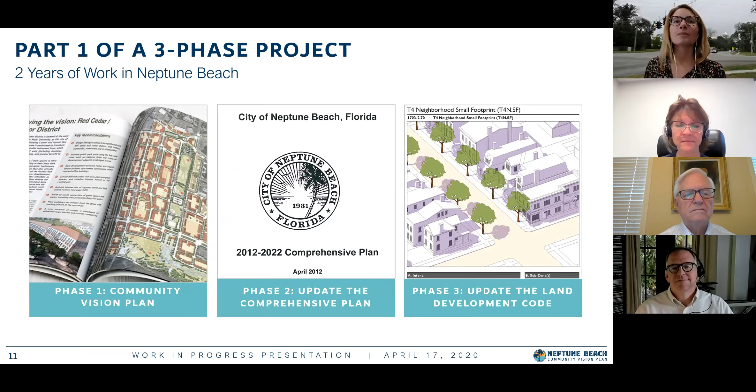I just want to remind people that this is part 1 of a 3-phase process, about 2 years of work in Neptune Beach. So we're working right now on the community vision plan, and that will serve as the foundation when we go to phase 2 and 3 to update the city's comprehensive plan and update the land development code.

This virtual charrette, this week of intensive workshops with people, stakeholders, and technical meetings, all of that had to happen in a virtual format. So here you can see some of the highlights we had throughout the week of our team working on tablets to draw sketches, working with Zoom to have technical meetings, and doing live streaming.

We had a number of tools available, and you can see some examples of that: people talking to us with the planner, live streaming all of our open design studio and all of our public meetings, and also using social media to advertise all of the events.

At our kickoff on Monday night, the video for which you can see on our website, we did a presentation like this one and then broke out into individual Zoom rooms. Here you can see Joe Coles was our facilitator in that room, with everyone chatting and having a good time. It was a nice way to connect with people.

This is our participant count so far. We're still going back and tallying these, especially with the live streaming - we haven't checked yet who's been watching the videos. They haven't been up for very long, but we'll be monitoring how many people are watching these meetings after the fact as well. We've gotten a lot of good participation, and a lot of people stopped by our open design studios for one-on-one conversations. It was great to see.

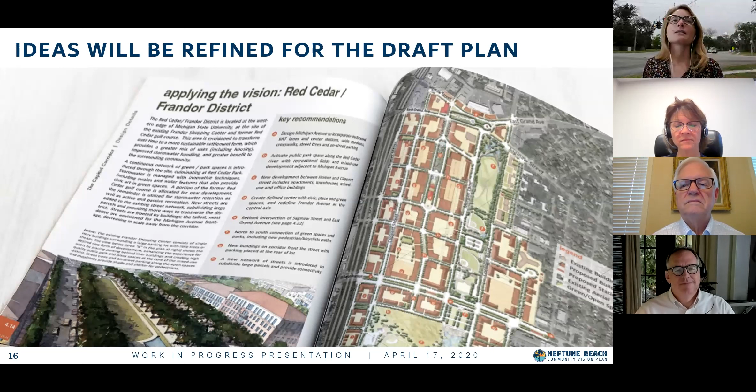All of this input is going to be refined over the next couple of months and will make its way into the draft plan. But nothing is final at this point, as Vice Mayor Jones said.

So let's do a quick poll to see who's in the room, as we always like to do. I'm going to launch a poll - you'll see just a couple of questions. Those who joined with the Zoom app will be able to answer them, and we'll take a look at the answers together, and I'll read those out as well. Should see a pop-up window which you can move around. Question number 1: have you attended any of the previous public meetings, including the January project kickoff, February neighborhood workshops, or any of the virtual charrette events? Your options are yes or no.

Second question, what neighborhood do you live in: Neptune Beach east of 3rd Street, between Penman Road and 3rd, west of Penman Road, one of the other beaches communities, the city of Jacksonville, or I don't live in the greater Jacksonville area. And finally, how old are you?

All right, we're getting several votes. About 50% of the people who have the ability to participate in the poll have answered. All right, about 60% have voted. Okay, seems to be a lull. A couple more. All right, going to go ahead and close the poll.

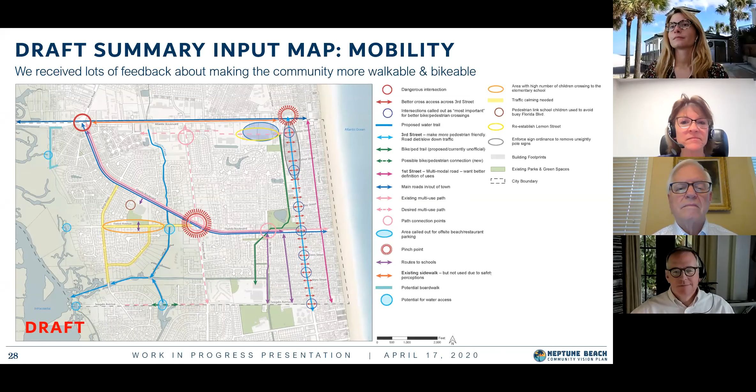I just want to say a couple of things about the shuttles and how they work. Most of these are what's called demand responsive, almost like Uber and Lyft, where you can actually summon a vehicle on your phone. These different shuttles don't follow any particular route like public transit, but rather they will come to you, or at least close to you, to pick you up and take you to a destination.

So that's why you don't see shuttle routes on the maps per se, but we do expect that they can link the various destinations. These shuttles are low speed, so they will typically go 10 to 15 miles per hour now, but we expect that they'll go faster over time.

We had a lot of people ask us, well, what does it take to get an automated shuttle? Around the state, we are one of the tops in getting pilots. So how can we help Neptune Beach pick some routes that are pilot projects where you'll be able to test it and see which sorts of trips are the best? You may need certain street design and some digital infrastructure and signage, so we'll make sure to include that in the final product. Next.

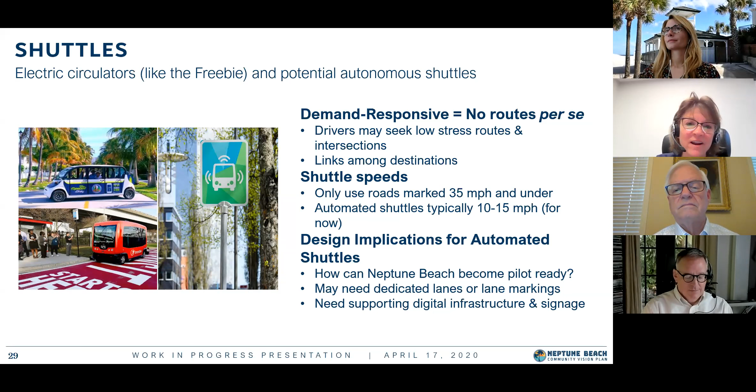We also are paying attention to parking. We understand there is a parking study underway, and a lot of the street work we're looking at has additional future parking implications. But the ones we wanted to point out are possible locations for garages. We got a lot of input on the necessity for beach parking. We've also got plans for some of the on-street parking in and around the town center, and we've got ideas there. There's also the possibility of a residential parking permit zone. Again, this is just draft, but we're looking at other cities to see how best to formulate something for Neptune Beach.

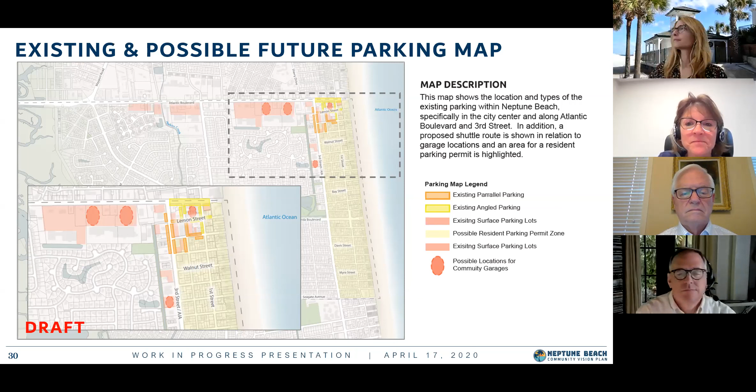We were also wondering about the parking garage of the future, because the state of the practice is in flux. Right now we have low demand, but as soon as we reopen we expect high demand. That may taper off over time as we find other modes and ways to get around. So architects are looking at adaptable garages. There's this thing called self-parking cars - you may have seen the Hyundai ad during the Super Bowl of the car that parks itself. That vastly reduces the amount of space needed for cars, and it's rapidly being introduced into new models. We're going to pay attention to that so we can give you the best input on how to design your garages. We also need to think hard about the reality of the finances, because construction, especially if it's quality and adaptable, can be quite expensive. So we'll be looking into that for you.

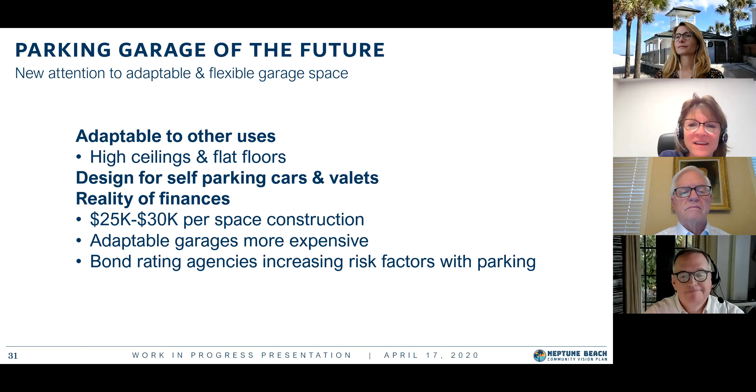For the residential parking permit, St. Augustine to the south actually has a pretty good one that they've tweaked a couple of times. Some features there: they allow Park Now cards for residents, so if residents want to pay at the meters at the town center, that would be made easier. In the controlled areas, residents can apply for two residential permits or decals that go on the car, in addition to guest and service passes. Then they assess the hours or restrictions that vary block by block, depending on the parking pressures. Multifamily may be included on a case-by-case basis.

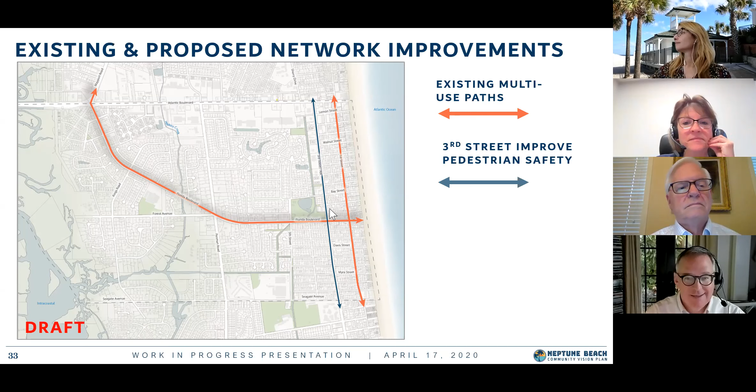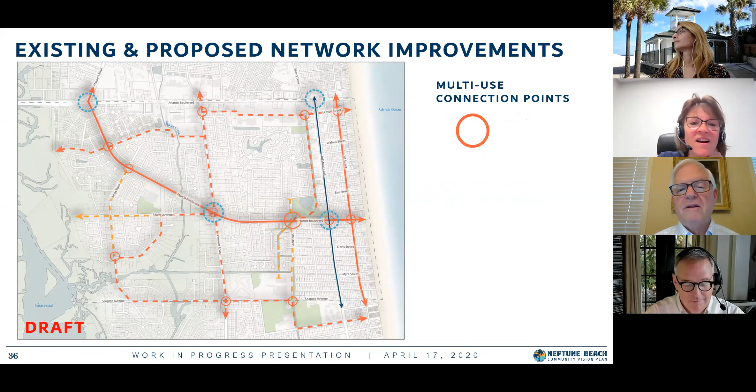Then we laid over that the top dangerous intersections where people really wanted us to focus. On top of that, we looked at some of the multi-use connection points - you can see some of these intersections show up in multiple categories. Then we put some of the key pedestrian points where we really need to focus, some along these roads but also around schools. That's where we heard the desire for better attention to crossing infrastructure.

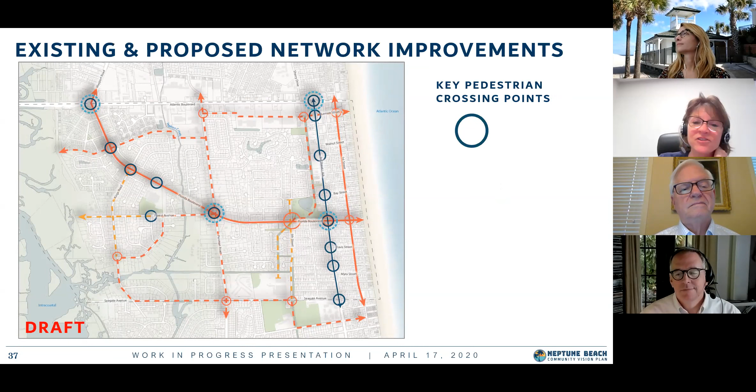And then this is just everything on the map. So if you want to go back and reference this map with your neighbors who couldn't make it, this is the one that puts it all together.

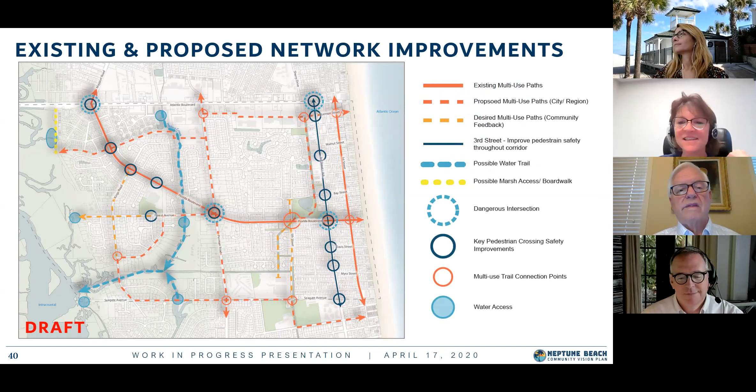And then with Rick, we've been looking at some of the FDOT, Florida Department of Transportation, context classification systems. Rick, do you want me to carry on, or is this your part of the presentation?

Rick, could you quickly talk through the context classification maps? Yeah, take us back one map.

The two major roadways are the ones under Florida DOT jurisdiction. That's A1A, locally called 3rd Street, and then Atlantic Boulevard. For many years we worked in the transportation business, and everything we designed was either rural or suburban - we didn't really pay attention to walkability in urban places. But this is a new DOT, a brand new approach they're taking now.

They have divided the state into context classification zones, zones of different context. The DOT has called the orange line at the top on Atlantic suburban commercial, as it exists today. The darker color is urban general. So you have enough of a grid street system on A1A and 3rd Street to bump it up from just a suburban category to an urban category. The higher your number gets, the greater your walkability - that's why it's important.

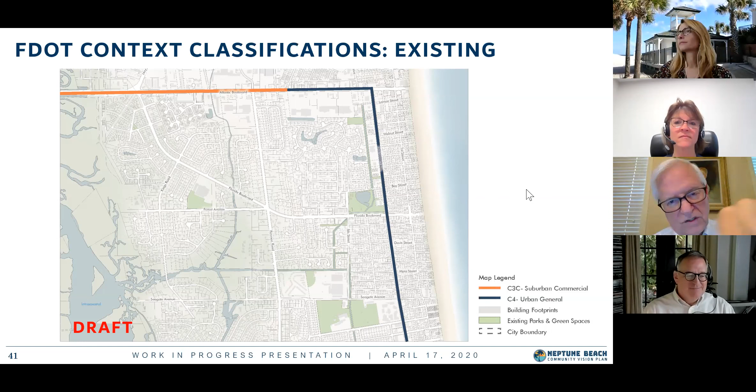So, Rick, I stalled there so you can show them the difference between existing and what-if. These are just showing the Florida DOT streets. What we are going to do is have the context classification definitions on all of your local streets also.

So the suburban is showing up here as a blue suburban residential, and the purple up in the upper right corner is an urban center, a C5. And this is a proposed version.

This gets us away from just being locked in on the existing way things are today. This is what we've heard from you as to what you would like to transform different portions of your city into - a different context - and take some of that urban center and move it out onto A1A and Atlantic. And then that's the justification for you to have DOT change the character of that roadway. Major, major change in the way they're doing business.

I'll add a point to that, Rick: this is about how land use and transportation overlap. So the goal is that you have land use patterns that match the type of street you want, and vice versa. The DOT can then, if you tell them you want this to be a slow or walkable street, come in and say, okay, what are you as the local government doing with your zoning and land development regulations to make the right kind of buildings and scale of enclosure on the street come to fruition from your local side, where you make the decisions. Then they're saying they will give you the street that matches the context you want. It's playing out pretty well across the state.

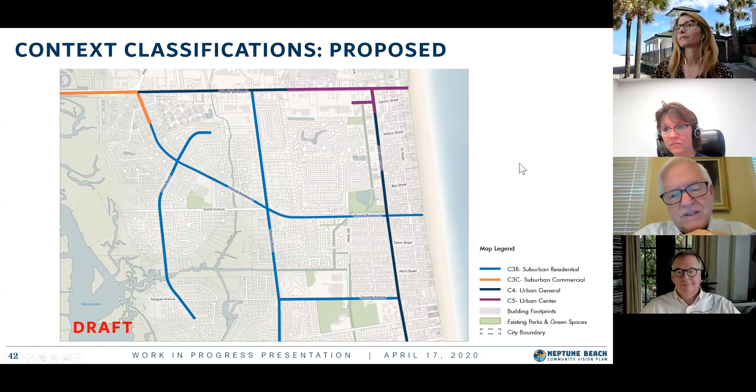Great, so I'm going to ask Brenda to unmute herself if she's not already. Brenda and Rick have been working this week on producing initial street sections that show how 3rd Street, A1A, and Penman can be redesigned in the future. Hi, yeah, can you hear me?

Okay, so this is what it looks like to stand on 3rd Street, A1A. You see here that you have a very narrow sidewalk and a grass strip, and very wide lanes.

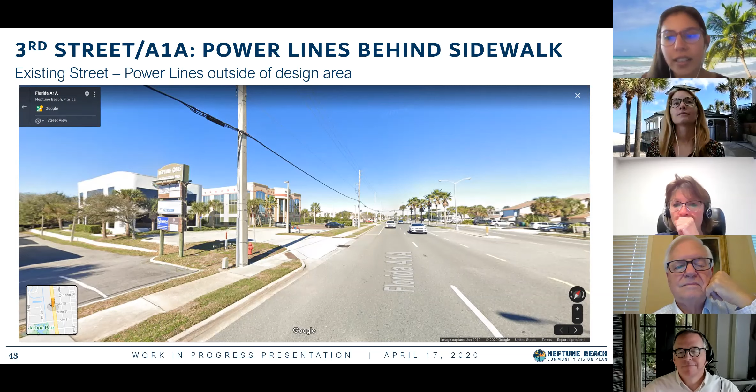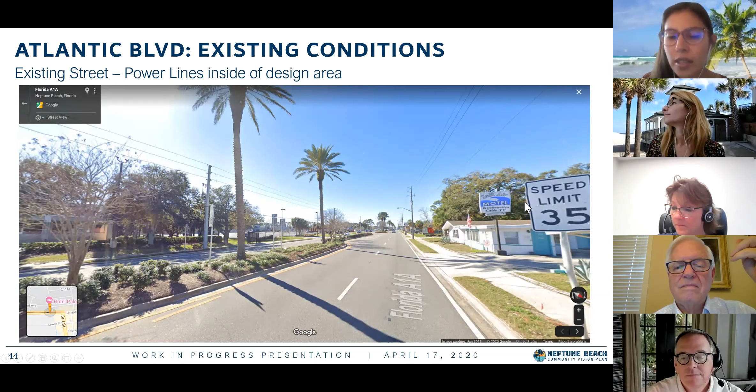And this is existing on Atlantic Boulevard. There is a median and there's left-hand turn lanes there. Also some conditions for pedestrians: you have very, very narrow sidewalks and a short grass strip. So it's not as comfortable as if you had shady trees when it's a really hot summer.

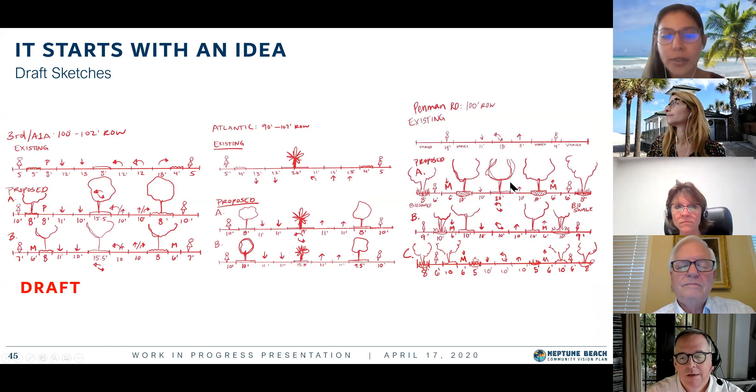So we started with some sketches. It all starts with an idea. We start sketching, it's all very, very rough. So this is what we showed at our pinups, and we all talk about it and decide whether these are good ideas or not. As you can see, there are many alternatives - there's an A option and then a B option, and sometimes a C option. So we work through that as a group and decide what best fits the streets.

So this is just modeling the existing conditions for 3rd Street. Again, you have a very narrow sidewalk and you have on-street parking. This is looking southbound. You have a median and very wide lanes, which makes traffic go really fast, even though there's a speed limit of 35 miles per hour.

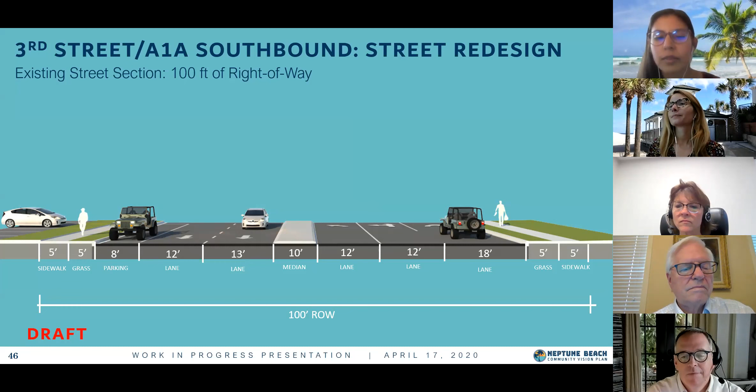Very similar conditions for Atlantic Boulevard. This is looking westbound. You have a nice median there, but most of the street is dedicated to vehicular traffic.

So this is option A, option 1, for both Atlantic Boulevard and 3rd Street. We noticed that they have very similar conditions as far as right-of-way - it has the same dimensions. So we said, what if we planned and designed something that could make it more pleasant to walk and ride your bike from one place to another. So this is a situation where you have on-street parking on one side of the street, and you have enough width for a bus lane for any bus routes. You have a narrower lane there. You still have a landscape median with shade trees, and you have the same condition on the other side without on-street parking. The goal of this section is to have a wider sidewalk on both sides and enough space for shade trees, which we believe would improve the walkability and experience of walking on these streets.

Right now, it's not very safe and it's not very pleasant. So landscaping that nicely would really improve that and give it some character as well.

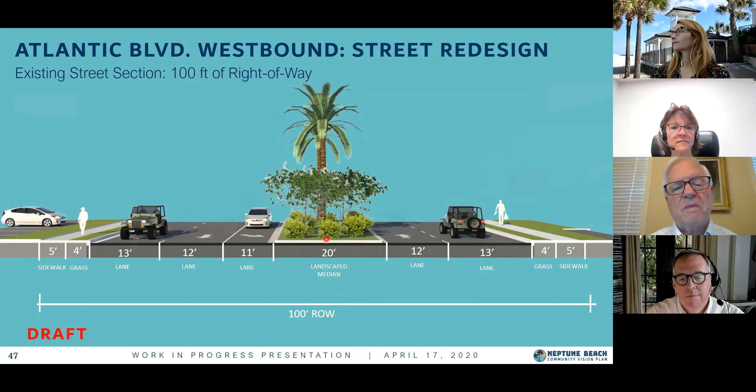And so let's go to the next slide, and you'll see the change. Look at the shade, look at the feeling of enclosure that you get.

These conditions, when they're put in, the people just appear. If there's any economic vitality in the city, which you certainly have, the people will get out and use these areas. The buses on the outside edge - that's the least amount of width they like to use in city transit, 11 feet - and what we do is take every half foot that we can, and make sure the pedestrians will be happier with the way we use the width of the roadway. A 10-foot lane may sound small, but a 12-foot lane is one they use on the interstate highway system, which is way too much for regular driving by people in a walkable place like this. And the parking we keep on one side would help support some of the commercial activity.

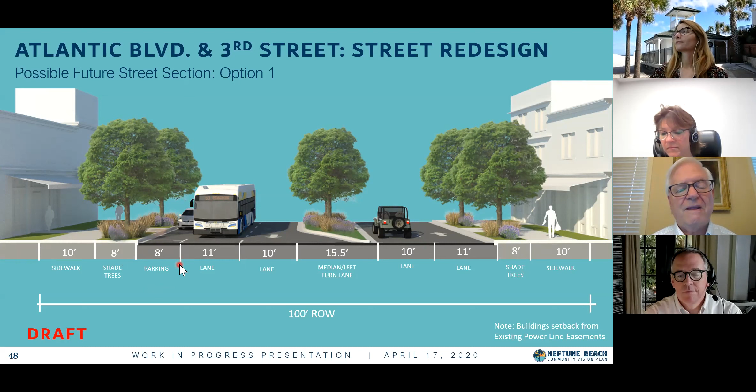Now there's a possible lane we've drawn in on the outer edge. You see the sidewalk that's 7 feet wide, and then there's a 6-foot mobility lane. We don't call it a bike lane, we don't call it a jogging lane. We say mobility because...

In the next 5 years, even we professionals don't understand what new modes might be used. There could be an electric scooter revolution, or something invented that we're not familiar with yet. So that mobility lane is going to be specified for vehicles under 10 miles per hour, under 15 miles per hour, or some limit on the speed.

When you have the same group of speeds that people are traveling, that's what makes it safe. Many of you have probably thought, I really don't want a bicycle out there on those fast-moving state highway lanes, and you're very wise to think that for your own safety. You don't really want to bicycle on the sidewalks all the way. So this mobility lane gives you a chance to get out there on your bicycle, your electric bicycle, or even walking, and have a good shady place that goes a long distance and really gets you somewhere as part of the system.

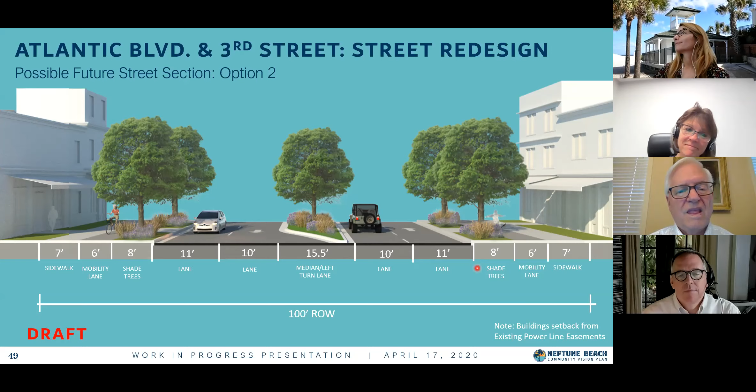Now over to PENMAN. PENMAN is one of the few long connecting streets you have besides those two state roadways. The cul-de-sac and suburban community patterns of development that happened after 1950 or '55 really were trying to keep out fast-moving traffic, so they're hard to get through if you want to go a long distance. And that's proper, we understand that. But this is one of the streets left to use as a mobility corridor for people who want to go a longer distance.

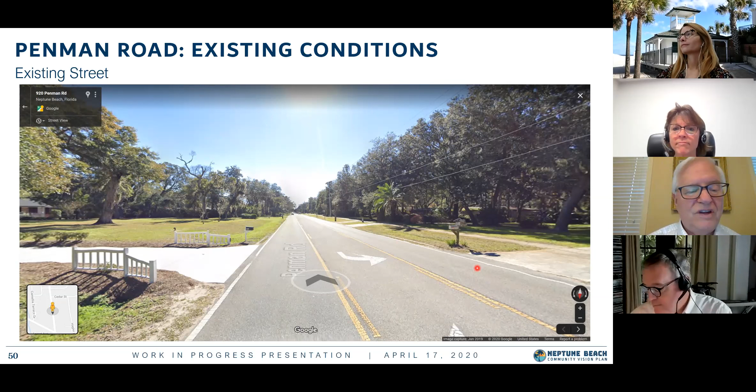But it's about 100 feet wide, and when you see this, you know it's really too wide to have drivers even think about going a little slower. So subconsciously, that foot goes on the accelerator when there's a lot of green grass on either side. And so that's the existing condition of 100 feet.

Two 11-foot lanes—not 12, and that's good that they're 11. We think they can go down a little more because speed is so important to the safety of crossing pedestrians and even the drivers themselves. Speed is so important that I have a radar gun. You push that little red button and get the speed reading of a car 800 or 900 feet away from you in either direction, coming or going. I take this wherever I go, studying places. I've used it in Neptune Beach, and you're mostly behaving yourselves. But speed is so vital that we pay attention to it with every design element.

Now that 13-foot lane in the middle—there are many driveways for residences all along PENMAN. For them to turn left into their driveway, if they were in a lane where people were waiting behind them, they would all be very uncomfortable. So you're allowed to get into that lane and turn into your driveway. That's important to keep as a safety measure.

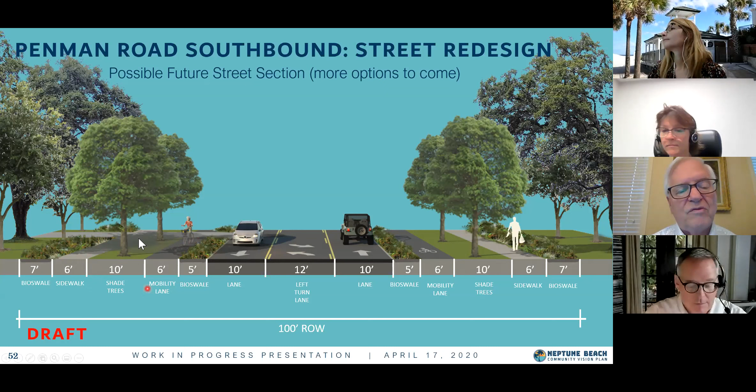Then the big addition is in that 10-foot planting strip to get a good row of marching trees. When we first started looking at what would help the walkability of cities across the United States, the places we saw with lots of active pedestrians all had shade trees in areas like this.

Then we've got a 6-foot mobility lane—we like that again, same as described in the previous discussion—for bicycles and other modes going about the same speed. Then two 10-foot lanes to slow it down. And we had to leave 12 feet in one spot because people turning into their driveways sometimes get a bit of an angle on their car, so they needed 12 feet instead of 10.

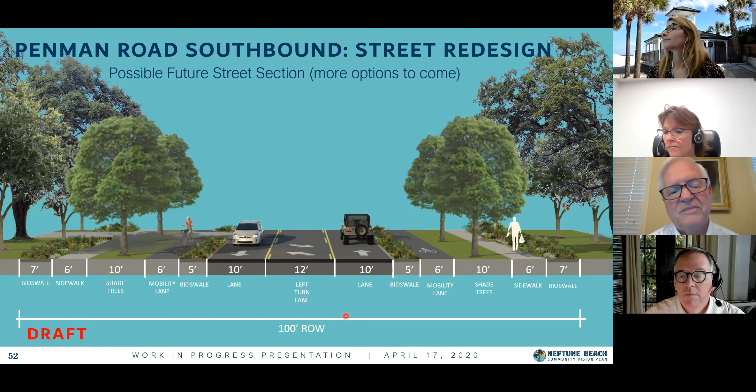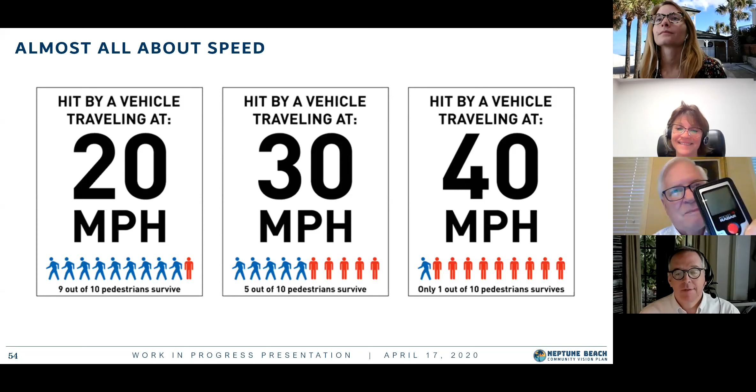Speed, as I said, is very important. My speed gun again—you should get one of these if you're at all interested in safety. When you go to a meeting anywhere and say, 'this is our speed gun, we took 30 samples and 27% were above the posted speed limit by 10 miles per hour or more,' that's a whole lot more effective and gives you credibility, instead of just standing up and saying it's kind of sort of fast out there and we're concerned.

So when you're a pedestrian, if you're unfortunate enough to be hit by a moving vehicle going 20 miles per hour, it's one chance out of 10 that you'd be a fatality. If the vehicle is going 30, about half the time you or your friends would not survive the crash. At 40 miles per hour, there's not much chance at all of surviving, because we are vulnerable, and the momentum of the car has so much energy at those higher speeds—it's an exponential curve of power with just an increment of 10 miles per hour more. So speed has to be a consideration for every single element of the street and intersection design.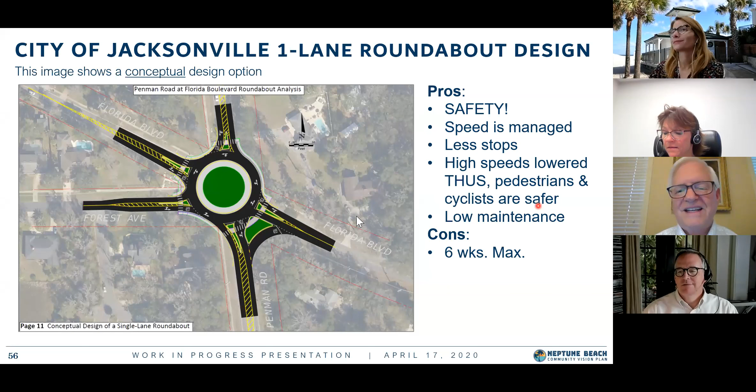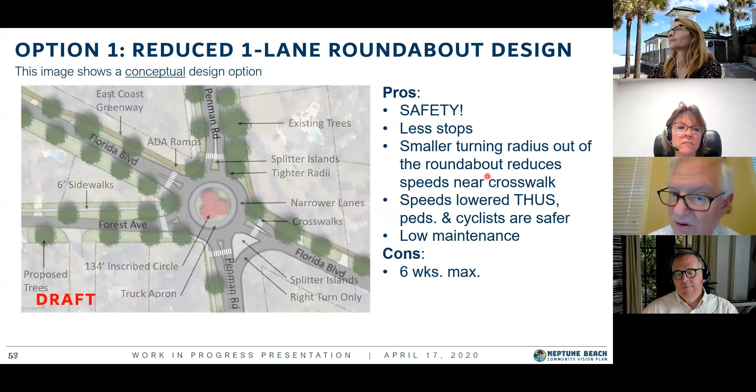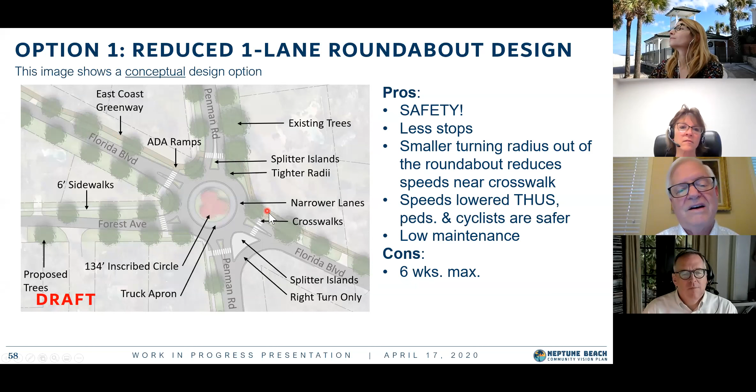We came up with a roundabout that had a smaller diameter because speed is important again, and the tighter the radius, the slower the vehicles will travel through the roundabout. We got those splitter islands and crosswalks lined up so the long and popular East Coast Greenway Trail would have an easy time getting across the northern leg of this roundabout to continue over to the east.

So as I said, you can't run a roundabout. The view that is most important to you as an individual to consider is what happens when somebody makes a mistake. Either somebody misses seeing the red phase in the signal because they're looking down, texting, or talking to a friend in the car. So when the crash occurs, how fast is the vehicle going? That's the most important thing.

Some of the discussion in that Wednesday meeting and other communication with you citizens was: what happens with the school so close? Won't that be a dangerous situation? In fact, the speed management characteristics of roundabouts make them ideal partners for mobility at schools.

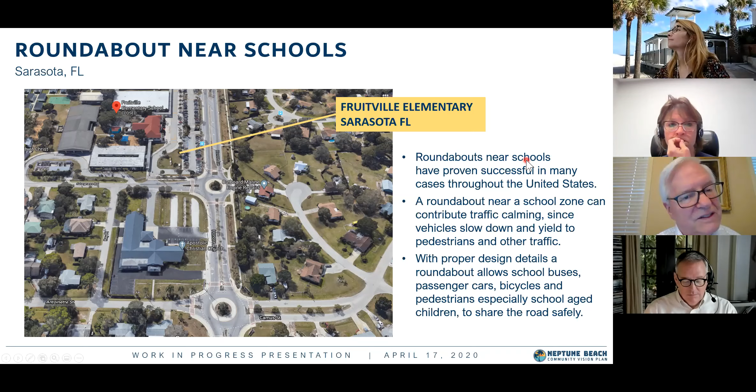Here's another one in Sarasota, Florida, a roundabout right next to school grounds that leads to all the other residential areas. So it's a very safe situation.

Now there are ADA requirements. That's the ADA. Victor?

Well, disabilities - we were asked a question during Wednesday's workshop, and we've gotten some emails about that afterward, about how one sets up these kinds of intersection designs that are different from conventional ones, so that they are accessible to people who are impaired, and how they meet the requirements for all ages and abilities - nationally, for physically, visually impaired, or just vulnerable users of the roadway.

So these are some of the standards we've been collecting. We're going back through the checklist - that's why it's shown here with checks - to make sure every one of these measures can be met in this road. It's the Americans with Disabilities Act, ADA, and so they're consciously and diligently looking for ways to make sure that our less mobile portion of the population, sight impaired and physically impaired, get across our roadways.

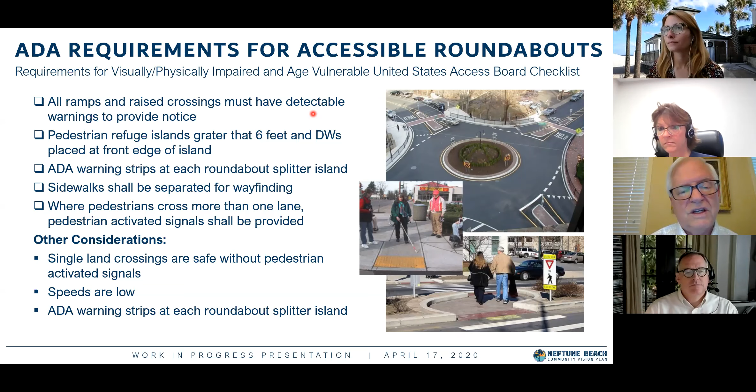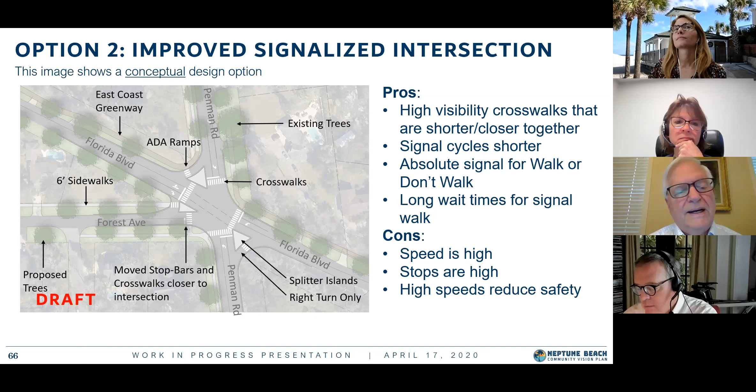Now, we also wanted to give a good amount of time to the option of keeping the traffic signals operating at this intersection. We did notice that the crosswalks were a little far apart, and we've drawn an option that has them closer together, so you have shorter traffic signal times. So this is the alternative we've sketched out, that if you decide to go with a non-roundabout option, this is one way to improve the intersection of Florida and Penman.

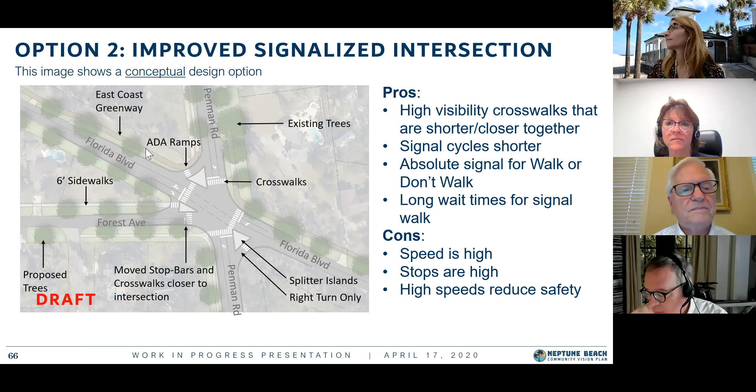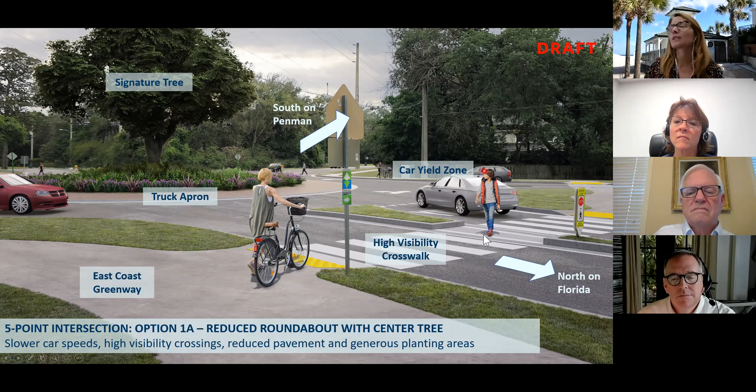This is obviously something for the community to decide, but it's an opportunity to display some public art.

This is back to the existing conditions, so we can show you the second option, which is the improved signalized intersection. You can see these different islands and dedicated right turn lanes we've created, and how we've pushed the intersection and made it much smaller. We've actually added pavers to the intersection that give a tactile difference for drivers, so they know they're going over these rumbly pavers that this is a slow area. There's a second option with that, which would be replacing the existing traffic signals with more traditional mast arms. We'll also be looking at another option with just one assembly that goes diagonally across, similar to what's there, but on the actual mast arms.

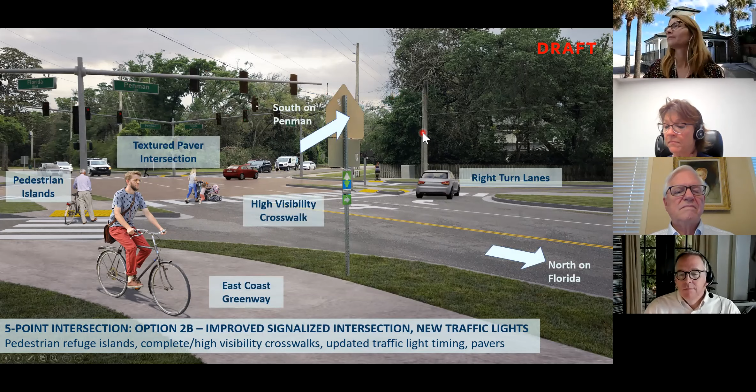Now we're going to go on to sustainability, recreation, and open space. Similar to streets and transportation, a lot of people had ideas and felt very passionately about providing more public space and opportunities for recreation, as well as for stormwater infrastructure and climate. So the results we heard varied a bit in terms of the kinds of civic spaces and open spaces people wanted across the three different neighborhoods.

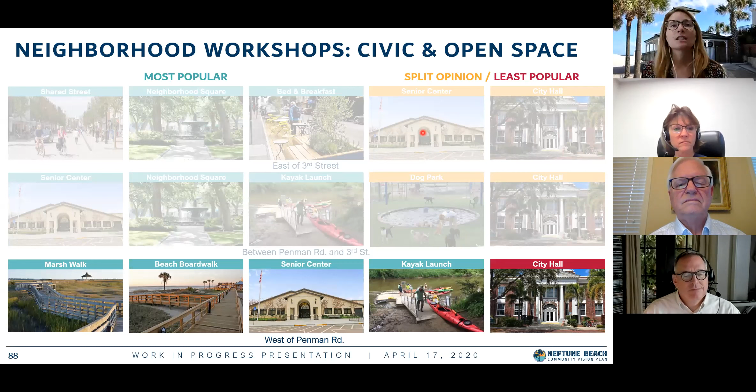East of 3rd, they really liked the idea of a shared street, a neighborhood square, and parklets. Between Penman and 3rd, they also liked the neighborhood square, but the kayak launch was very important, as well as the senior center. West of Penman, they really liked the recreational facilities like the kayak launch, the beach boardwalk, and a marsh walk. The senior center was also very important.

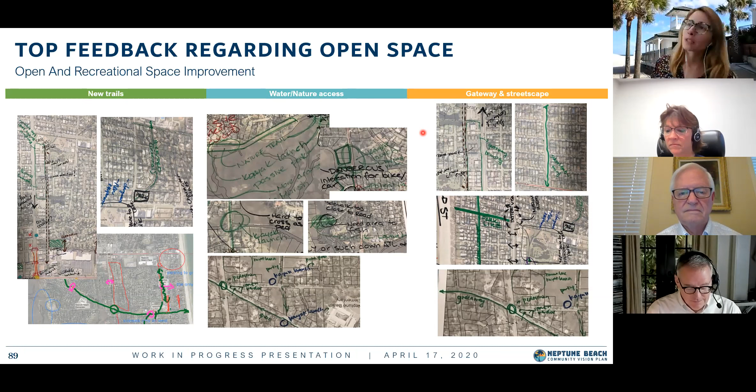Sue Zhang, one of our designers, has been focusing specifically on areas for new trails, ways to put in water access, and different streetscapes and gateway elements that are harmonious with nature. She's collected all the ideas we heard in our maps and our virtual maps on Monday night, and put together a draft map to locate where these different places could be.

That includes opportunities for kayak launches that you see here, opportunity for a potential new marsh walk along here and here. We're still exploring which one is the most feasible, but these are possible locations. Also a pocket park or an improved park here at the end of Forest and at the end of Seagate.

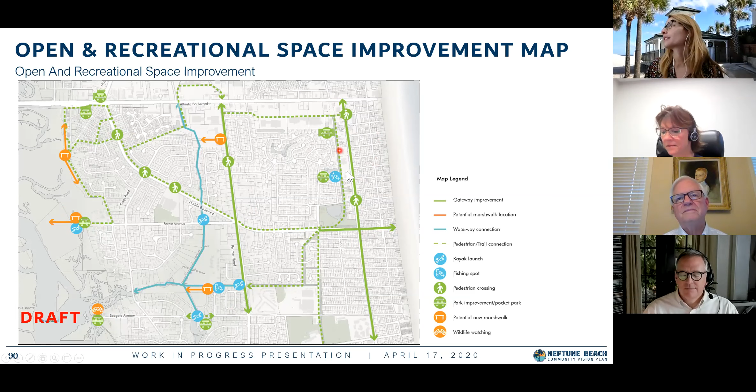Also what we call these gateway improvements, areas that can really be enhanced with a new signature public space. There's also a new fishing spot she added, in a pond that would go across with this canal trail. We heard a lot about this canal trail, and Sue looked into it in more detail to see what that trail could look like. A lot of people, we've been told, are already using this path, and there's a chance to do a lot of nice things on it — the path doesn't have to look the same the whole way across.

Sue's gone in and started to break up what the different characteristics of that trail could be like as it goes through different environments. So here, as it goes along this canal, parallel to 3rd Street, we're calling it more of a civic and commercial character. It would go along the commercial buildings, passes through the library, then into Jarboe Park where it has a different character, and then through a residential area potentially, if it is to continue.

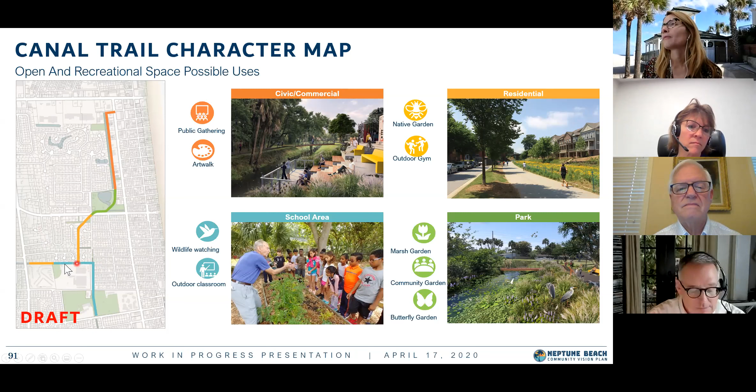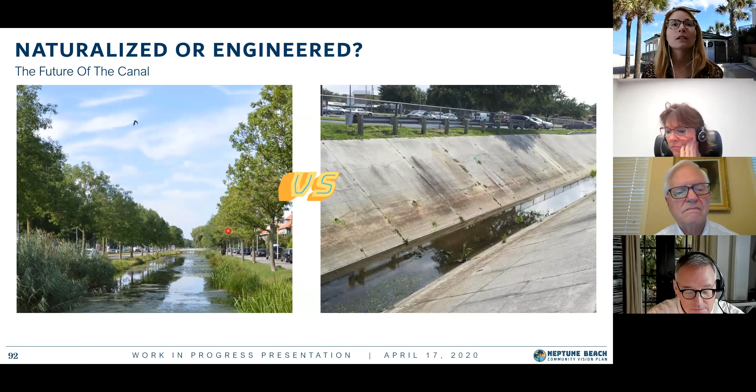Sue's been doing a lot of research on hardscape versus low impact development, which is when you use natural elements to help filter and clean stormwater, and also slow it down. As much as possible, when you can do more of the one on the left hand, you create ecosystems there that are beautiful, but also serve to clean your water right where it lands and where it's collected.

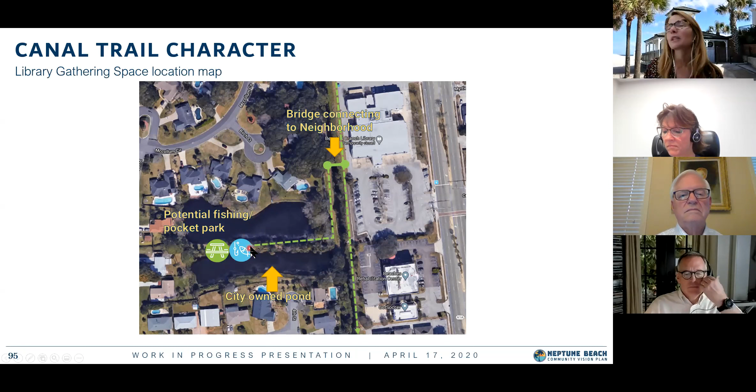There's an opportunity to connect this trail that would run along the commercial properties of this canal to this pond as a potential area for recreation, with a small picnic seating area and a place to fish. That's a city-owned pond. So here she's done some before and after visuals, we like to say.

This is the existing condition of where this trail is running. This is right adjacent to the library. And until now, the library doesn't really interact at all with this space—it's the back of the library, there's no fenestration, no windows, no openings that spill light onto the space. There also is no formal trail.

Sue thought this was a really good opportunity to do a unique public space. What if this could be transformed into a really special place where people can enjoy nature and gather together? You see that she's incorporated public art and murals along the back wall of the library, colorful seating areas, as well as a really nice trail for people to walk on.

This potential bridge connection is what would take people to that pond that I showed in the previous slide. This is a part of the trail that goes through Jarboe Park.

So here again, an opportunity of how this part of the trail could look different. Sue did a lot of sketching. She was trying to figure out how this would work and what plants she wanted to use, and what the different elements would be—a floating leaf area, a grass zone. From this sketch, she actually went and created an image.

This is the existing trail right now, and here is what it could look like with proper vegetation—natives, using native plants as much as possible, not only to filter stormwater as it runs off the trail and into this canal, but also to create habitat. This is a proposed bridge that's part of the park plan already underway, including educational opportunities and signage to explain to the community what they're looking at, what the plants and animals are.

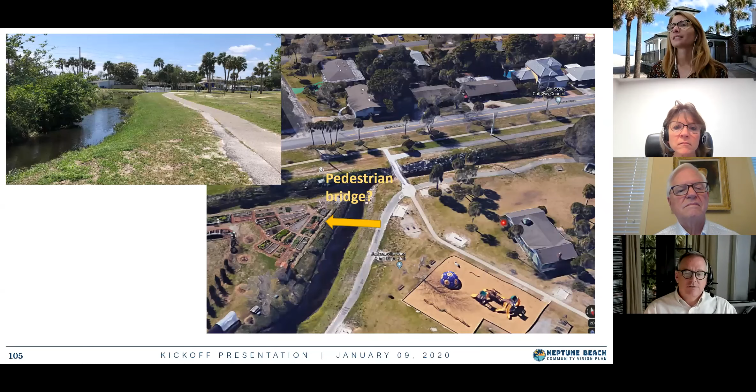Louisa, while you're on the subject of the trails, can you just drop back one? Sure. Listening to the conversations this week, and I was in on some Zoom meetings and online design studio interaction, where some of these ideas were emerging during the course of the week.

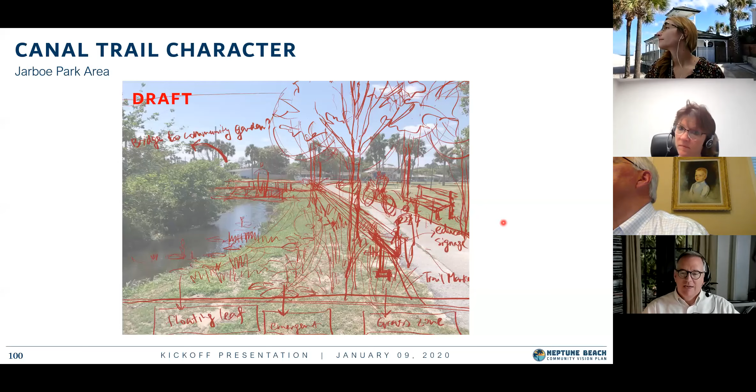One of the frequent questions with trails, especially in neighborhoods where people aren't used to them, is about safety. So I just want to go on the record saying we heard you—we have heard your questions about safety. There are a lot of basic best practices, like making sure that trails are properly supervised. They have what we call natural surveillance, or what maybe in your neighborhood you call eyes on the street. You have to have eyes on parks and eyes on linear parks as well.

Any place occupied by people is automatically safer than one where there's hardly anyone around, because you can see or call for help. You also need lighting and standards for operation, and you can go beyond that to get more safety with cameras and that sort of thing.

There's a lot of trail projects all over the country where they've confronted the exact same issue. I want to make you aware that we heard the question, and we'll come back with more details on these trail ideas. We're going to make sure we can answer your questions about safety.

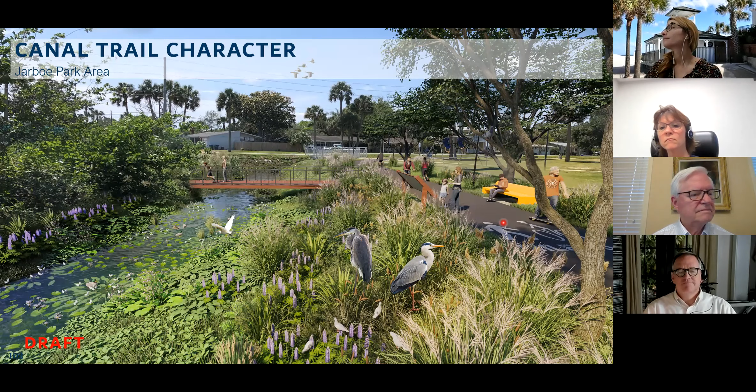Great, thanks, Victor. So now we're going to move on to commercial redevelopment and ideas for the town center. I know the previous section talked about open space, but we'll still see a lot of examples of open space with these ideas as well. There's a lot of interconnectivity between these three topics, so you'll see some ideas that also relate to transportation and street design.

There were some big ideas about local businesses, commercial redevelopment, and the town center - another big topic we need to address. We asked people during our neighborhood workshops what type of commercial places they liked, and by far the most popular were places sensitive to the context of the community, such as a small neighborhood coffee shop that almost looks like a home, a local restaurant, corner store, a neighborhood commercial center, and this mixed-use town center, an example from Jacksonville.

We also asked about housing, and we'll talk about this a little later on, but wanted to bring up that there were some missing middle options, such as the duplex and the courtyard bungalows, and accessory dwelling units such as a granny flat, that were also popular with all three neighborhoods.

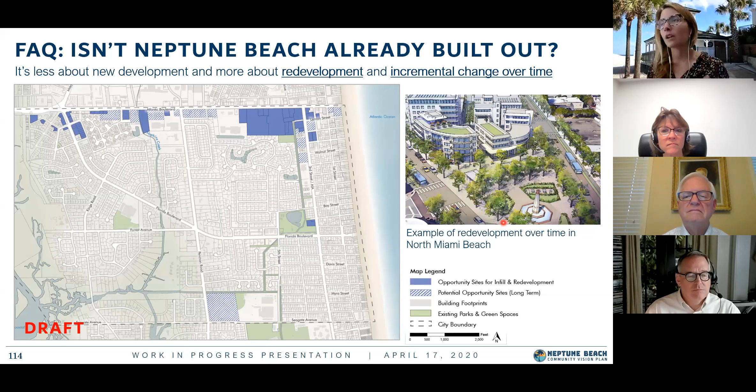And with that, I will introduce Victor to explain this slide.

During the course of the conversations this week, one of the things we realized is that when we just throw out a term like planners use, like mixed use, people immediately wonder, well, what does that mean? What do you mean by that was a frequently asked question this week. I appreciate that, because mixed use is a kind of catch-all term that planners, architects, and transportation planners use to describe a more flexible mixture. Sometimes what's upstairs in a mixed-use building is office space, sometimes it's a hotel upstairs and a restaurant downstairs, sometimes it could be housing, whether owner-occupied like condominiums or apartments. So the answer to the question about what do you mean by mixed use is: it depends.

That's a very site-specific thing, but there is one thing about mixed use that's pretty fundamental, which is putting some destinations within walking distance of where people are working or living. And when you do that, something very interesting happens. Car trips get fewer, and if they don't get fewer, they get shorter. Some people will still drive, but less distance, if they can find what they're looking for without having to go a long way. That's one of the benefits of having a mix, a combination of living and working, living and shopping, or living and dining.

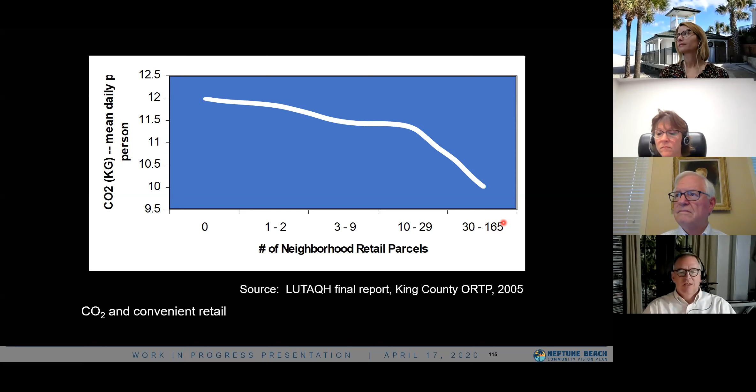But something interesting happens with mixed use. When there are more choices, like more retail parcels within walking distance of a given residence, with a little bit more, your carbon footprint goes down. But after you hit a certain point, it drops like a rock. And that's what you see in this graph. So anyway, just to advance this conversation about mixed use: first, what I mean by that depends, and then mixed use has benefits.

If you're worried about traffic congestion, or about who all these people in all those cars are, one of the things you can do is bring land uses closer together instead of spreading them further apart. That's why mixed use and transportation impact are so important.

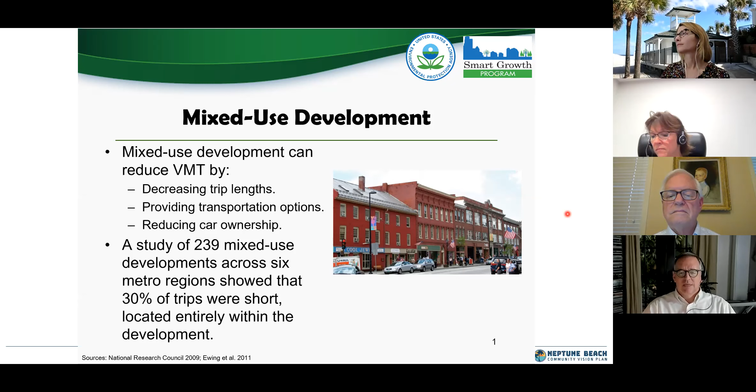It also tends to help people have more options, like I mentioned. Next, I'm going to let you advance them.

So when people say, what do you mean by that? When they're talking about mixed use development, they're often talking about the former Kmart site and all the controversies of the last couple of years over different ways that property could be reused by its owners. We have what we can call a grayfield shopping center where the anchor tenants have faded or are fading. It's a big area - when you take the planning area together of the 500 Atlantic, 571, you're talking about a substantial amount of acreage in the town, so there's a big canvas on which to imagine things.

Maybe mixed use development would help here. Depends on what you mean by that. At the very least, it's worth examining, because how this site turns out will affect how people see it, see the whole town in the future, and how you use the town, how it feels.

So I want to say, as we look at images of it, to remember that everything we've illustrated in the last couple of days is just starter ideas for the conversation that has to come. It's not finished. We've made some pretty cool graphics to compare alternatives, mainly because we realized there's going to need to be a bit of a process of elimination.

Where you say, could you do this? Maybe. Could you do that? No, that doesn't work. And go down through the list.

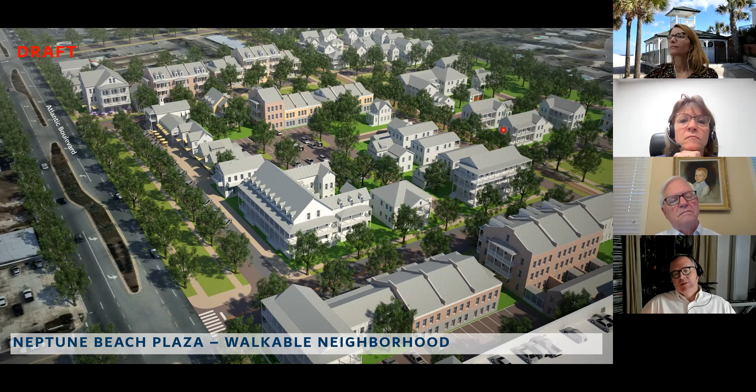Now go to the next slide if you don't mind, Louisa, and I'll just speed through this. Zooming out a little bit, I look at this map and realize that the beach town center east of 3rd, on the right side of your screen, and the big shopping center area west of 3rd that we were just talking about, are really all parts of the same community. They are two important neighborhoods, certainly visually different, they grew up at different times, but in the end you're all in this together. There must be some way to weave these two sides of town better together, particularly if you're going to want pedestrians to make their way back and forth across 3rd. So go to the next one.

First, here's that initial what-if that illustrates the idea that Atlantic and 3rd should be upgraded. What if, instead of being the most forgettable, least attractive streets in town, they were modified with tree lines and better architecture over time, so they became proud signature corridors, like gateways to the neighborhoods you'd be proud to take your visitors down as they approached your house. That's the idea, and why...

...the transportation stuff you heard earlier from Rick is so important.

On the eastern end of Atlantic, what if that last block east of 3rd was made like a plaza instead of a street that's not quite a street? What if it were a public space with outdoor dining, and it invited the redevelopment of the motel on the south side of the block, south side of Atlantic, between 1st and the beach?

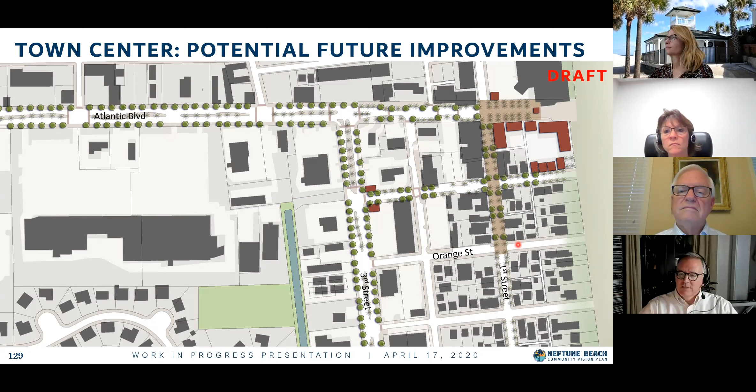And of course, if that works, you could expand from there over time.

Now here's putting those two ideas together: one for west of 3rd, where new buildings are built in the former parking lot, and the existing shopping center is rethought in its entirety and becomes the next great neighborhood there. So you're seeing the two on the same map.

And what you probably noticed by now is 3rd Street becoming, instead of a barrier between the two sides, a connection—not quite ready yet for a lot of people to make their way back and forth.

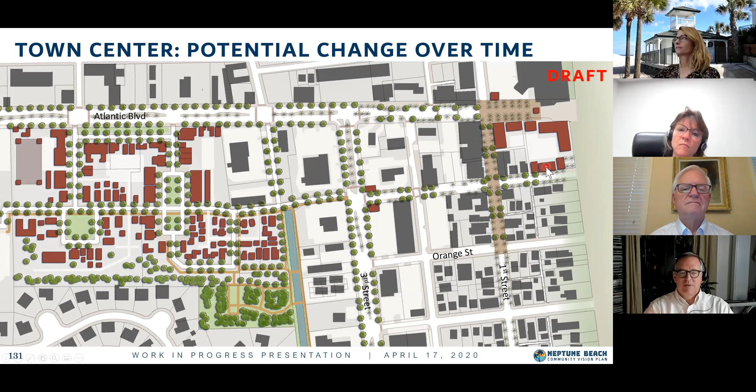So what you're seeing illustrated here, which we'll show in close-up, is the idea of redesigning the whole intersection so you cross two-lane roads instead of one seven-lane road. More to come on that.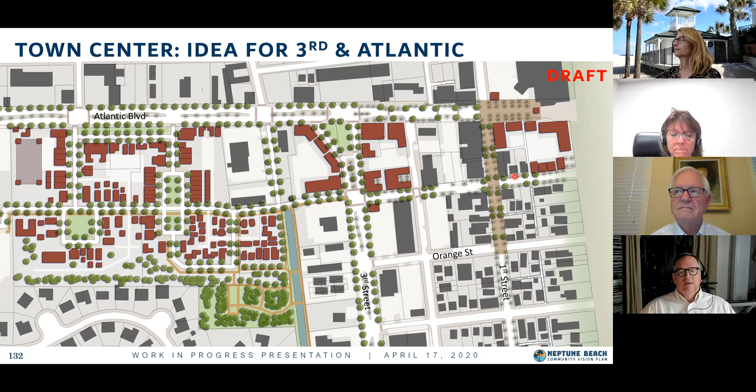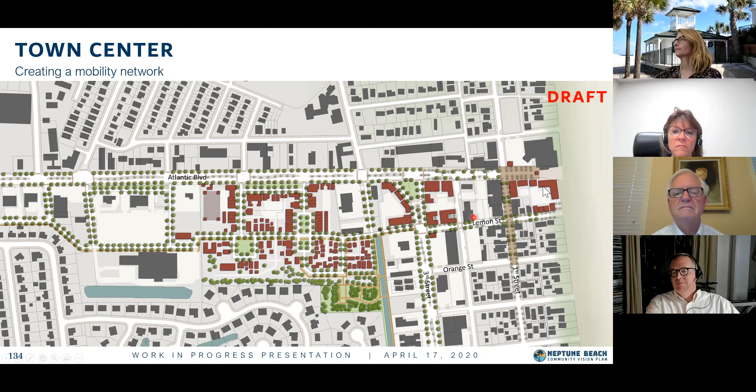Zooming out a little, here's a before and after. Now you can see how the idea of an interconnected system of streets and blocks, like in the historic town, could be implemented west of 3rd and join the two together with both Atlantic and Lemon.

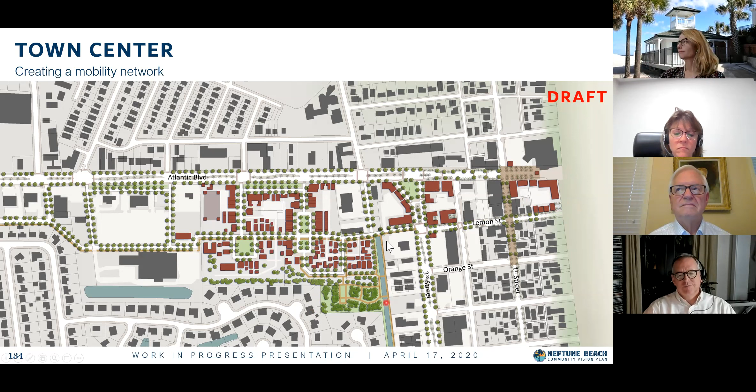And then we've added other things to that. These illustrative plans are like a big bulletin board where we put each idea as it comes up and see how they go together. So here you see ideas for improving the public park just south of the existing senior center, and adding the trail to the canal.

Now, that intersection at Atlantic and 3rd was the single most raised issue I heard in conversations. It's almost like a cloud of uncertainty over the future of pedestrian life in the town. Fixing it would be like a big symbol—it would send a message to everybody that you're taking this issue seriously, not just the safety, but the comfort of the experience people are having.

So here's a close-up on that big idea. The red line down the center of Atlantic is, of course, the border between the two towns, so you have an opportunity for a lot of teamwork here between the DOT, the Transportation Planning Organization, Atlantic Beach, and Neptune Beach.

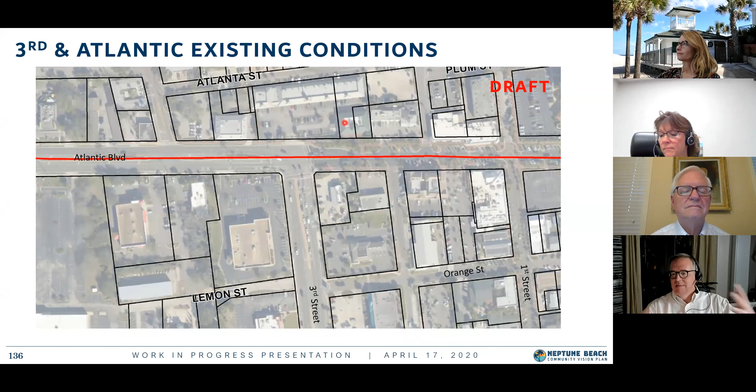And here's an initial layout of how you might take the one seven-lane road and redo it so all the turns are accommodated. The traffic works just as well, or better, than it does now for motoring—perhaps a free right from eastbound to southbound—and also make a public space.

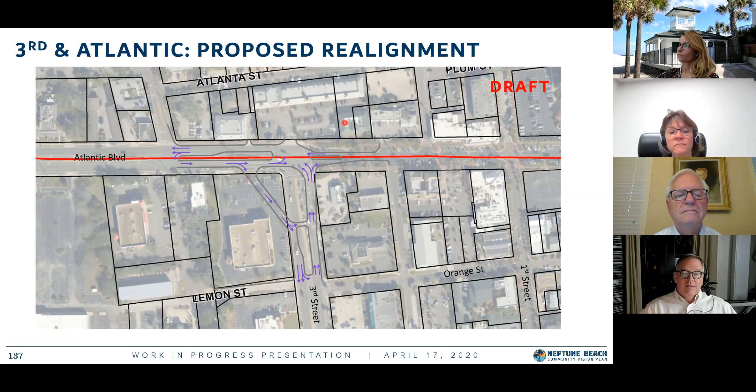And so here's that idea implemented, with the public space and eventual redevelopment shown together.

Just like what I said about the shopping center, you can predict that the Walgreens and CVS will eventually be redeveloped. You can predict that the Starbucks, where a gas station used to be, will also be redeveloped. So here's just a quick placeholder what-if sketch for those three things coming together: a redo of the intersection and a redo of the real estate on both sides.

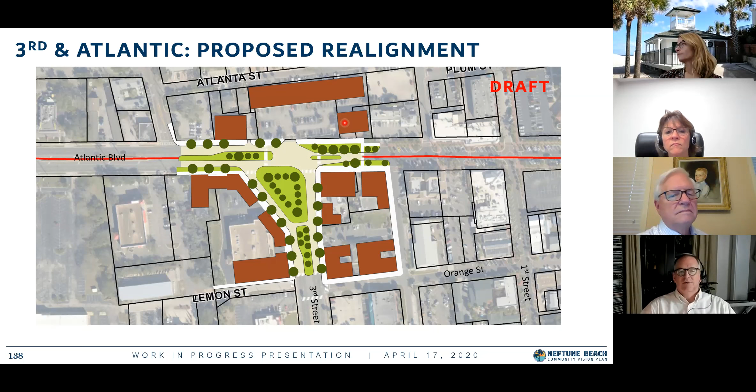Again, that's an idea that needs a lot of scrutiny. But it does remind us to look back at the historic pattern of the town. And that doesn't just apply here in the town center, it applies in other parts of town as well.

Like here, for example, is a piece of the old historic plat. Can you put your cursor on Atlantic Boulevard and Florida Boulevard so they can see how historically that was originally imagined, where Mayport and Florida come together? Now go to the next one.

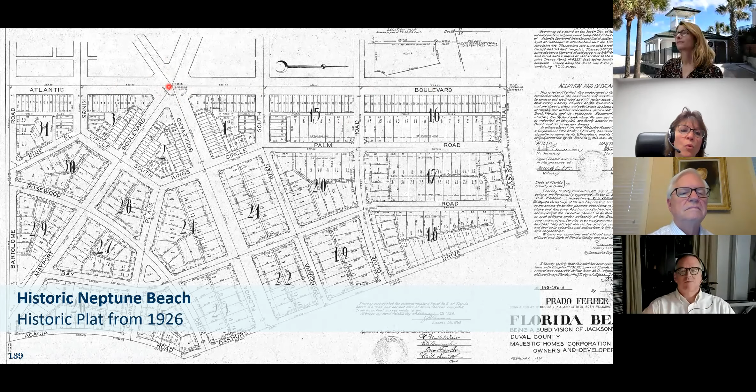In other words, your historic town is an interconnected street network, blocks that are subdivided into parcels and lots that have individual development projects on them. And that goes together in an interconnected pattern.

Someone suggested we look at Pawleys Island and St. Simons and other places like that as precedents for this idea of building up a village from more smaller buildings rather than fewer bigger ones.

If I have to make a prediction about 2020, it's that a whole lot of people have been working from home for the last month, and they're not going to be all that excited about going back into that long and miserable commute to downtown Jacksonville. There might be an opportunity for somebody who produces office space closer to where they live in Neptune, if they do it in a way that architecturally feels comfortable and is street-oriented and friendly.

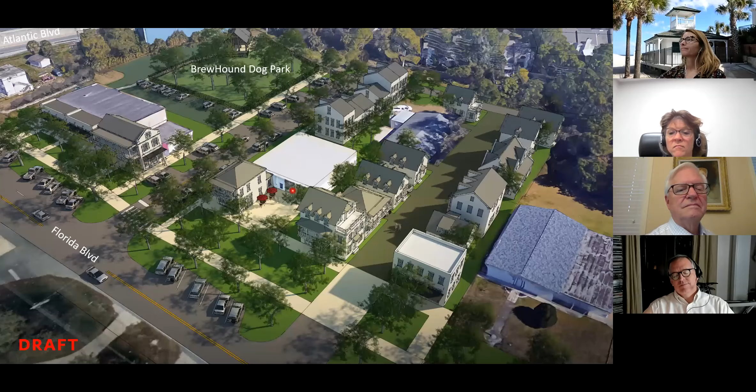Yep, can you see the slide? Yeah, we can see it. Go right ahead. Okay, so this is the last thing we're going to show you.

We heard this from a lot of people. We asked the question online if people thought there was an opportunity for more art and spaces for cultural production, like Victor mentioned, creative office space, co-working space, maker spaces. And we asked people if they had any ideas for how art can be incorporated.

And we heard a lot about this intersection. This drawing, I'll caveat, was produced just about an hour or two ago, so we're still going to be working on it and adding to it, but it's just to show a concept for how this main entry point that was in the original plat that Victor showed you, supposed to be your central location of Neptune Beach, the grand entryway into your city.

We had a technical meeting with local artists. There's an incredible artist community, not just in the beaches, but in the greater Jacksonville area, who are active and engaged. That's a great resource.